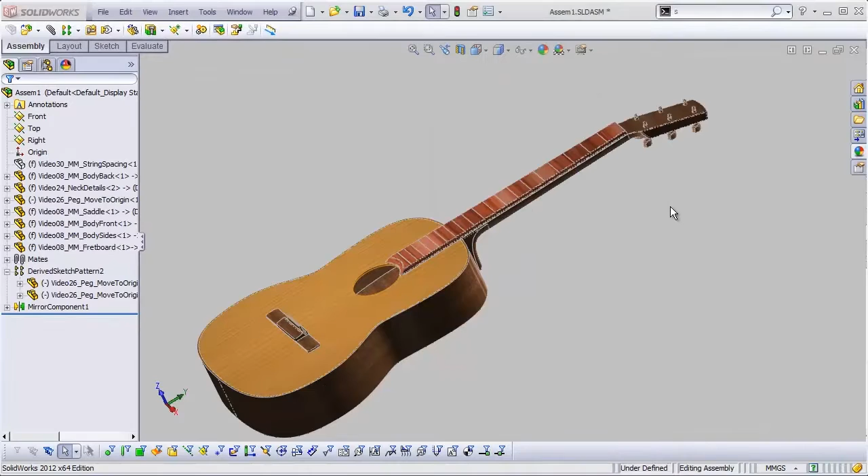Now we want to actually put the nut on this thing, but the nut is a little bit different from some of these other components in that it's not really important to put it in here. It's kind of cosmetic more than anything, because probably if you were putting a nut on this thing, you would probably buy it online, and then you would just chop it down to the size that you want, and then notch it as needed.

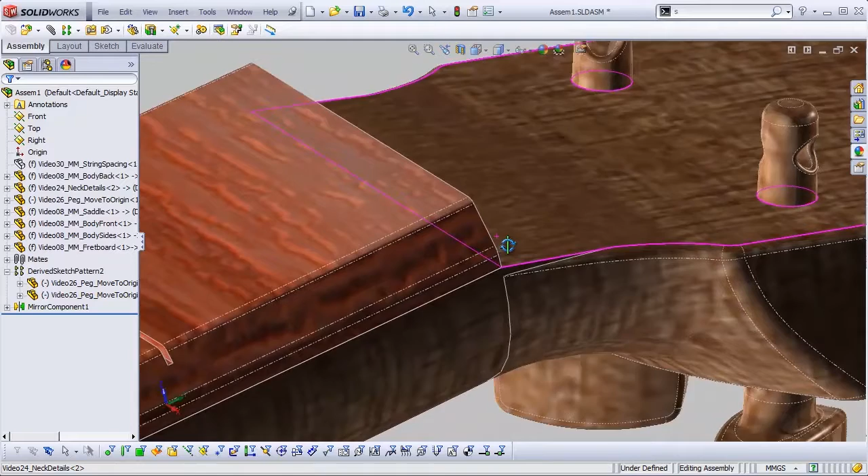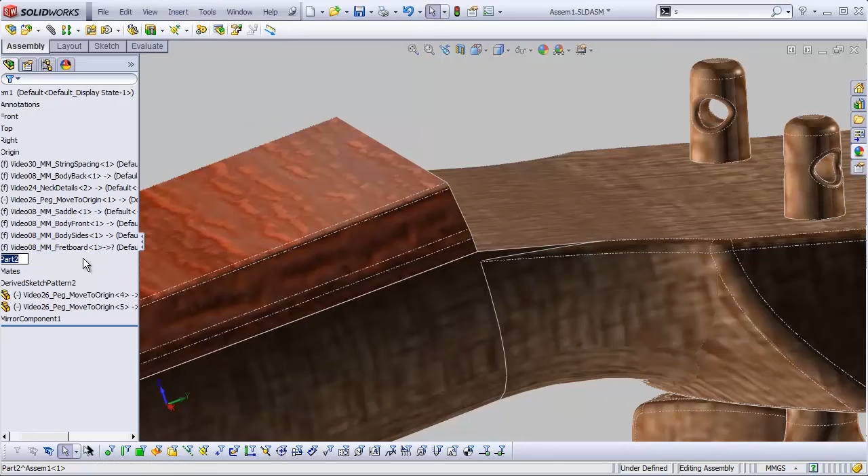So in this case, it's really a cosmetic component. We don't need to have the same rigorous control on it that we have on everything else in this assembly. So let's go and create a new part in the context of our assembly. It's going to drop it in, give us this little check mark, and the check mark is so we could create a sketch. So I'm just going to hit escape because we don't need a sketch right now. Then I could rename this. Let's call this video 31 nut. Alright, so we have a nut here.

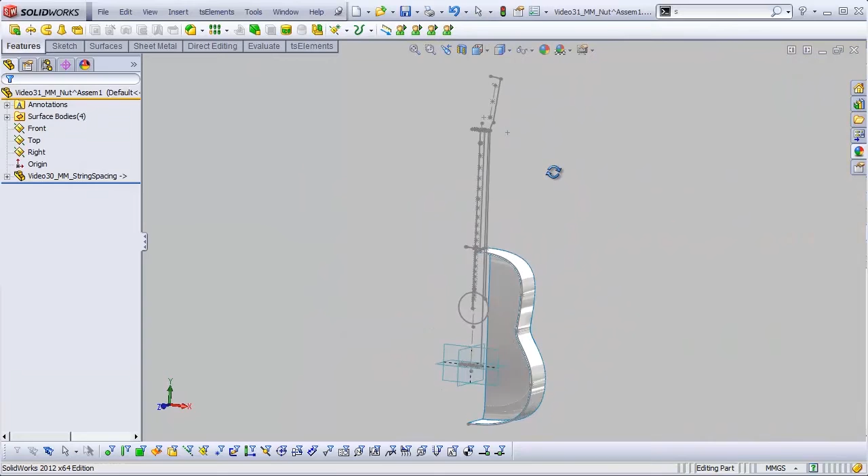Now I'm going to open that file. So we have our new blank document here. Insert part. And then I'm going to find the most recent version of the master model and insert that. So we have it. This is just like every other component that we've created so far, by the way. And when we bring this in, let's make sure that we get our planes in there as well, because we're going to want those. We can hide these surface bodies, and we can hide all those planes as well, for now. And then close this guy back up, and we'll go back to our assembly.

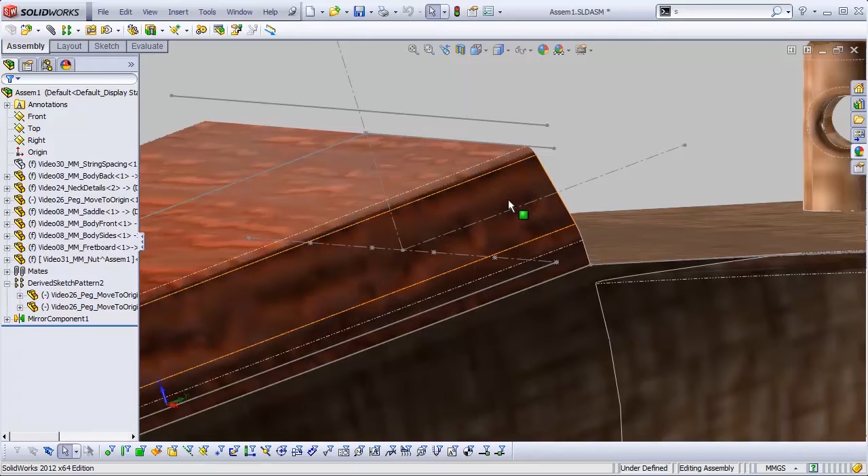Now we can see our sketch components are in place, and those are going to be really useful, and we even have our nut height sketch right here ready to use. But the other thing about creating a nut is that once it's put in here, we're going to want to file it down so that it matches the profile of our fretboard. There are different strategies by which we could do this, and I'm going to do it in a way that, for a robust assembly, I generally don't recommend. But in this case, because the nut is kind of an unimportant component, I mean, it's important for playing, but in terms of this assembly, it's not a critical key piece of the guitar. So I'm going to take a shortcut.

Let's grab our nut file here, and first of all, let's make sure to save it. Right now it's in brackets. You can see the name is in brackets. That means that it's internal to the assembly. It hasn't been saved in an external part yet. So let's go here and say Save Part in External File. Click OK, and that's just going to save it out for us so that we have a copy of that externally that we're referencing.

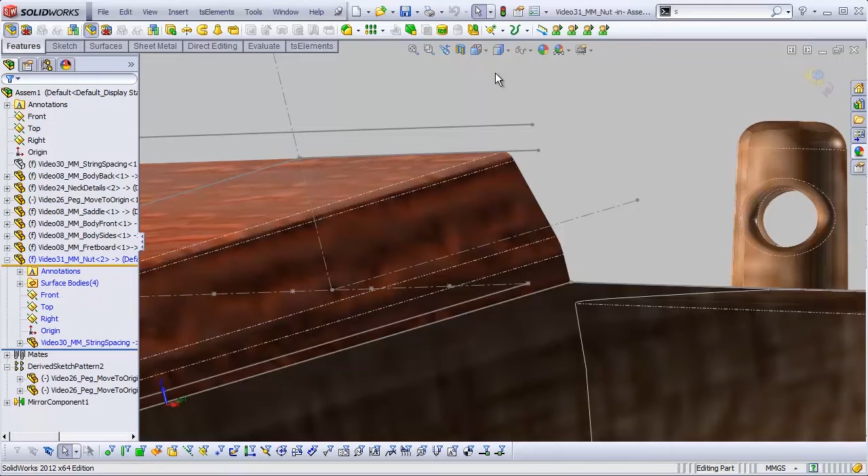And now I'm going to click on it and click this Edit Part button. So it turns blue because we're editing it in the context of the assembly. And now we can actually work with it. What I want to do is grab hold of these surfaces and bring them into this part. And we have a couple of options when we do that. When we're working in the context of an assembly, you're going to see this little button right up here. It's kind of a link icon with a red X over it. And that says No External References.

Now generally, when working in the context of an assembly, I recommend leaving this checked because you don't usually want to be making cross-references within an assembly. You don't want one part in an assembly to reference another part because trust me, that just gets messy. I mean, real messy. It's going to make your life really hard. But in this case, I'm actually going to make an exception to that rule, because it's going to be really helpful to us to be able to reference these surfaces.

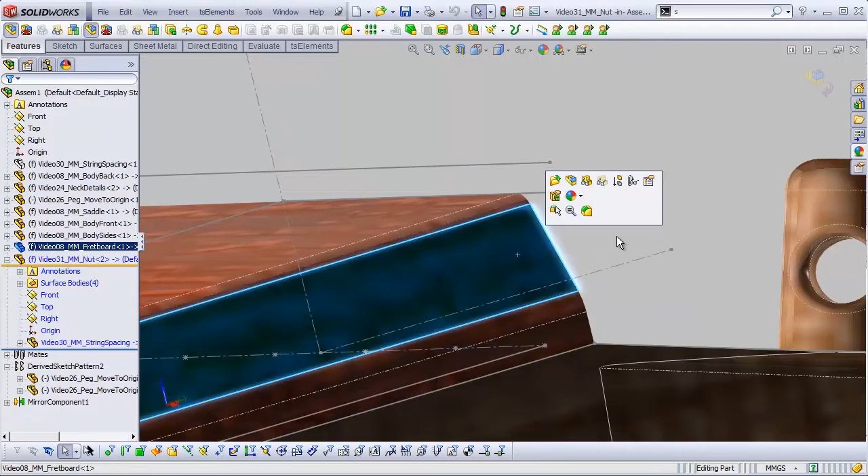And like I said, this is a non-critical component, so we can get away with it. So let's go to our Surfaces tab here. We're going to leave external references turned on so that we can grab our Offset tool. Grab these three surfaces and just offset them by 0 millimeters, which is just a clever way of duplicating those surfaces into our current component. So now we have them in there to work with.

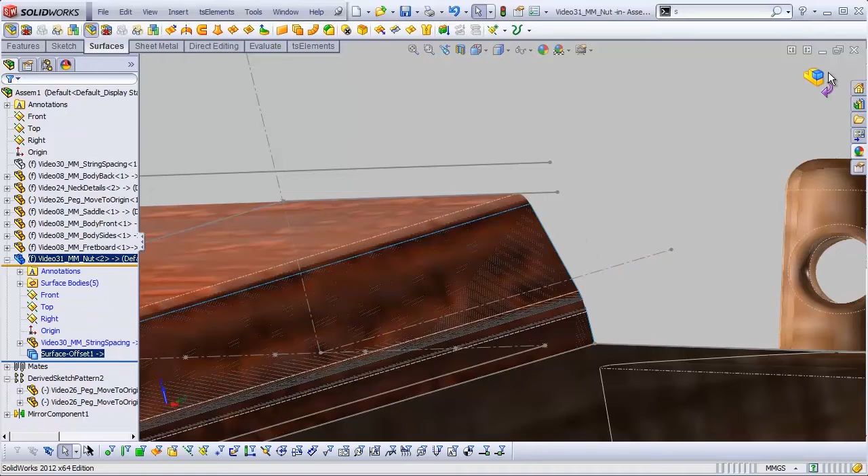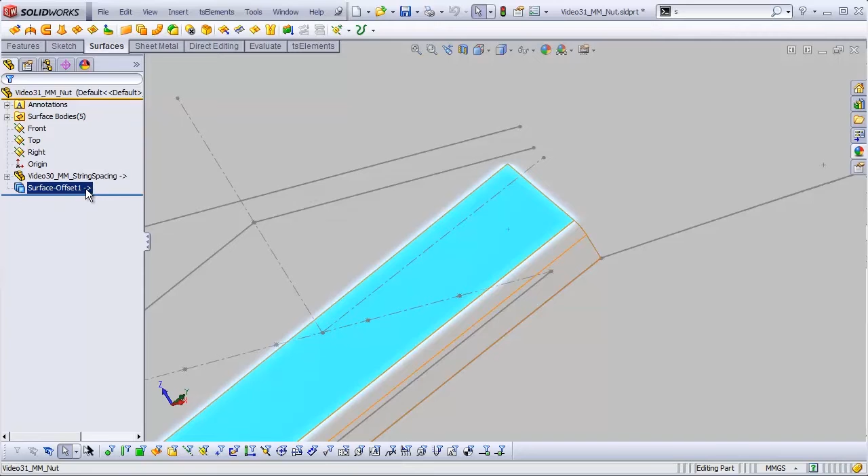So we can exit that now. Let's open up this part. And we're going to see that now, if we zoom in here, we have those surfaces in place, and those surfaces happen to reference that other component, the fretboard component itself. So you can see here the surface offset has this little arrow next to it. That little arrow means it's referencing geometry outside of this document.

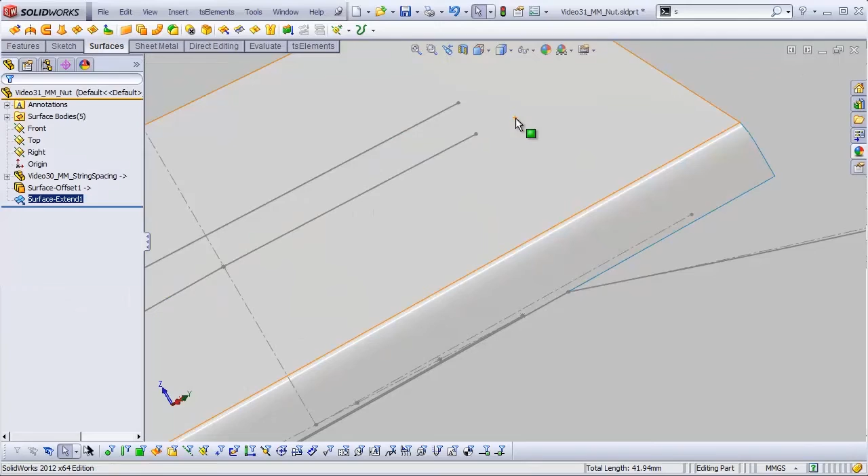Alright, so let's go up here to the top and grab our Extend Surface tool. We're going to extend this edge, and how about we get these three edges as well. And we'll go out by 10 millimeters using the same surface method. Click OK, and now we have a little bit of extra to work with on that surface. That's going to be useful to us. And then also we'll probably want to define the top of our nut.

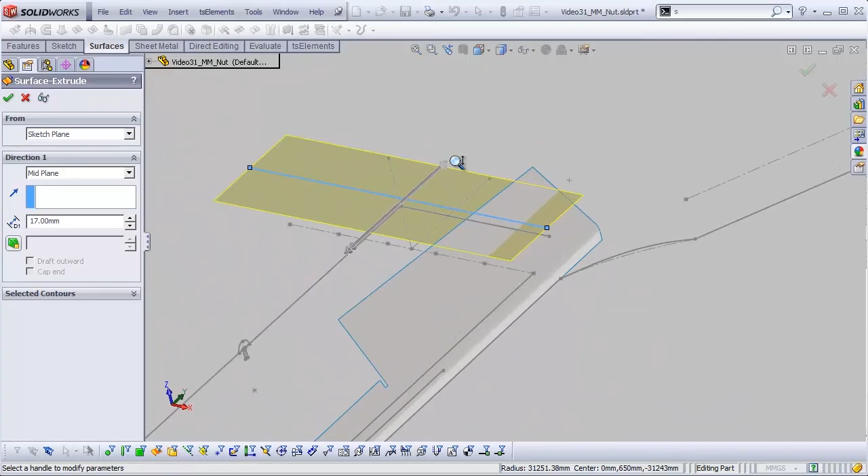So let's extrude this. I'm going to extrude that out. Let's just say it's a mid-plane extrusion, so we're going both directions. So we get more than we need on there. There we go. So that's plenty nice and big. And finally, just to be sure that we got plenty of this, let's edge extend this last edge out just a little bit on that side. Looks good. And now we can actually model the basic shape of the nut.

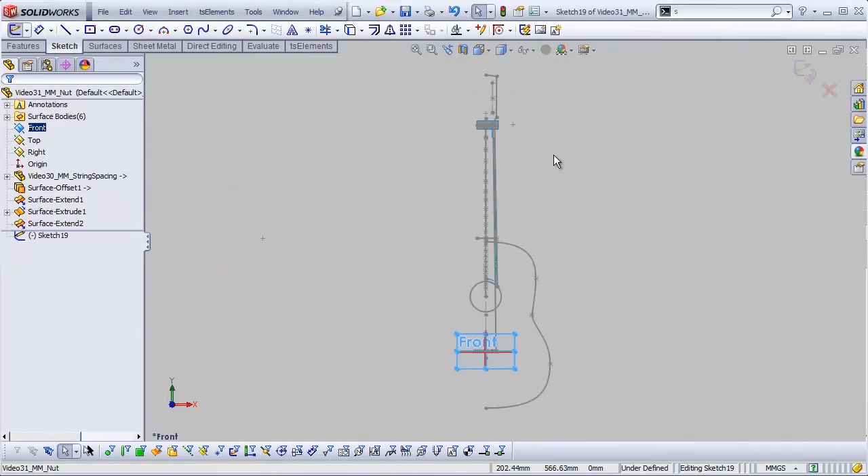So let's go to the front plane and create a sketch. Zoom right on in. Grab my rectangle tool. I'm going to do a corner rectangle, just like so. Grab my right plane and make this edge collinear with the right plane. I'm going to make this point coincident with this outside point on our fretboard. And then we just have to define the width of this guy.

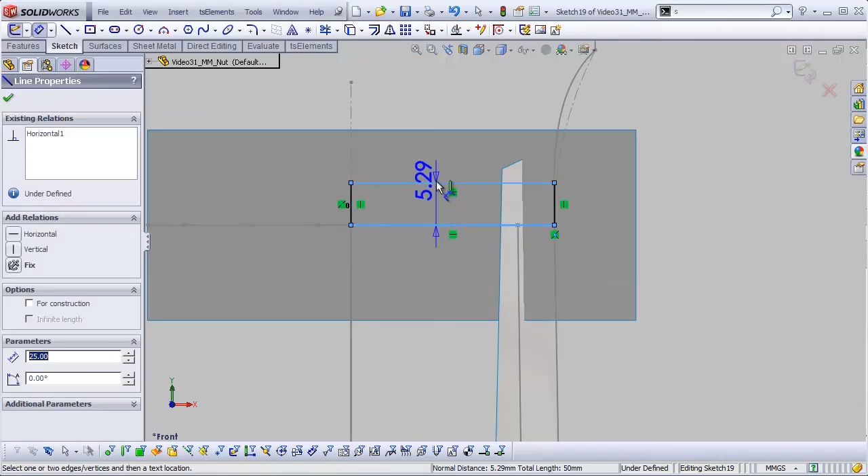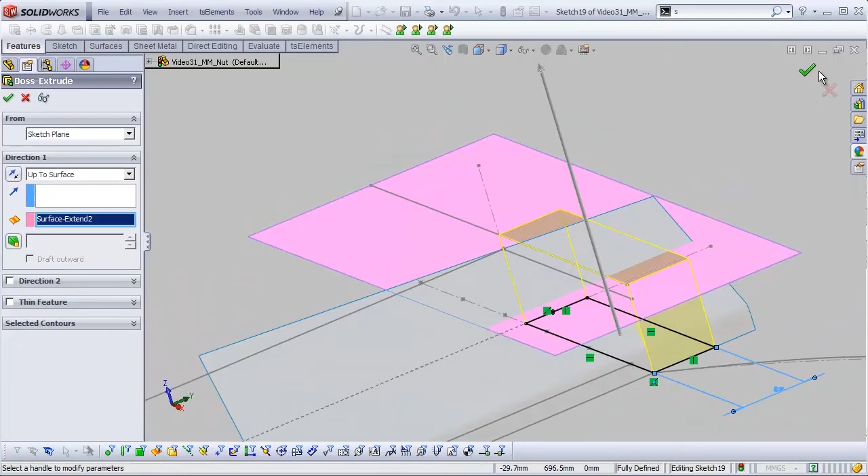We'll set it to, I believe, 6 millimeters should be just about right. A lot of times these things are 1/4 inch. We'll just call it 6 millimeters and be done with it. And we'll extrude that. And when we do our extrusion, I'm going to say up to surface, and we'll just come right up to this nut height surface that we created. Okay, so we got a solid there. We can hide that surface. We don't need it anymore.

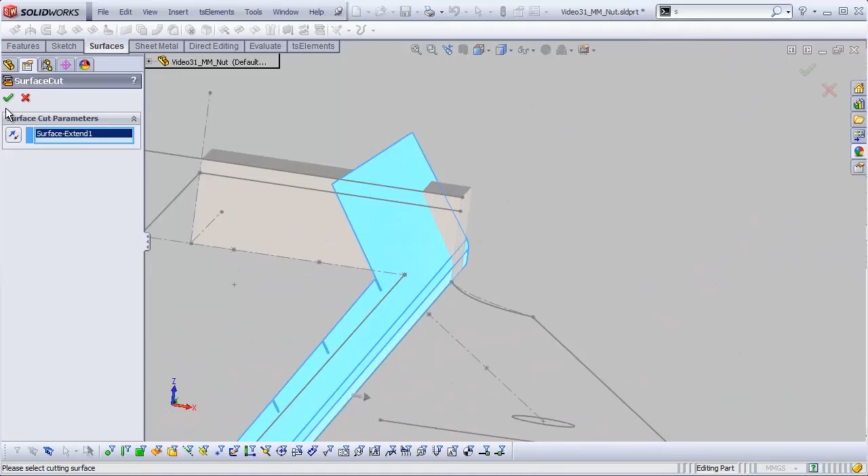We can also go to our surfaces, cut with surface, use this surface that we imported from our fretboard. Let's find that arrow that shows us which direction it's going to cut. I'm having trouble finding the arrow, so I'm just going to click OK and hope for the best. And it looks like it was already pointed the correct direction. Alright, so that looks good. Pretty happy with it. Let's go to our features. We'll grab our round tool.

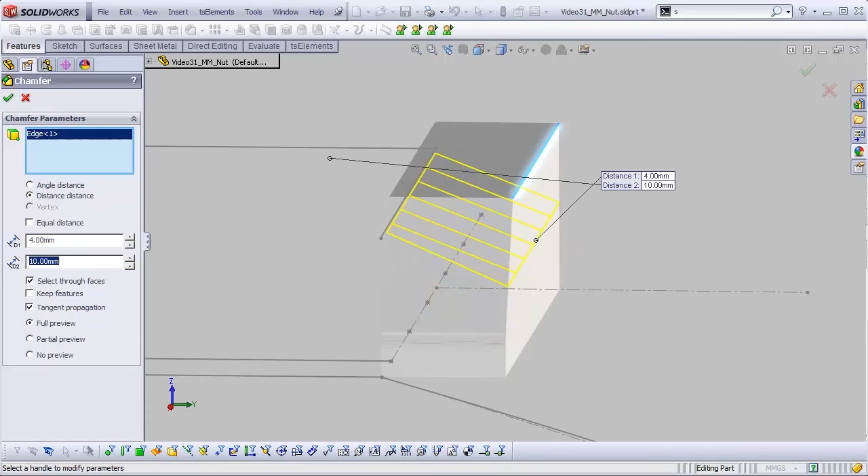Let's do a chamfer. I'm going to grab a chamfer on the back edge of this guy. I like distance chamfers. It's kind of a style thing. You can do whatever you want. I'm going to make it 4 millimeters on one side, 10 on the other, and actually I think this first one is what I want to be, I don't know, 2 millimeters. That looks better. Yeah, so we got a little bit of something to work with there slope-wise for the strings to go straight down. And then we could duplicate this.

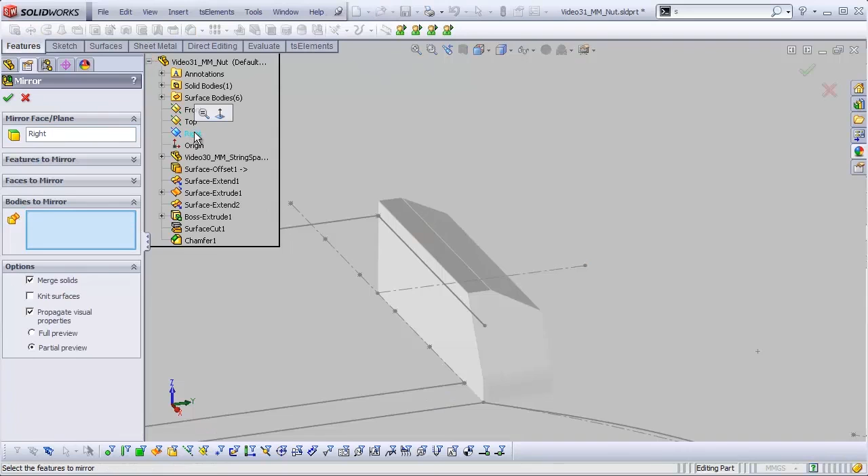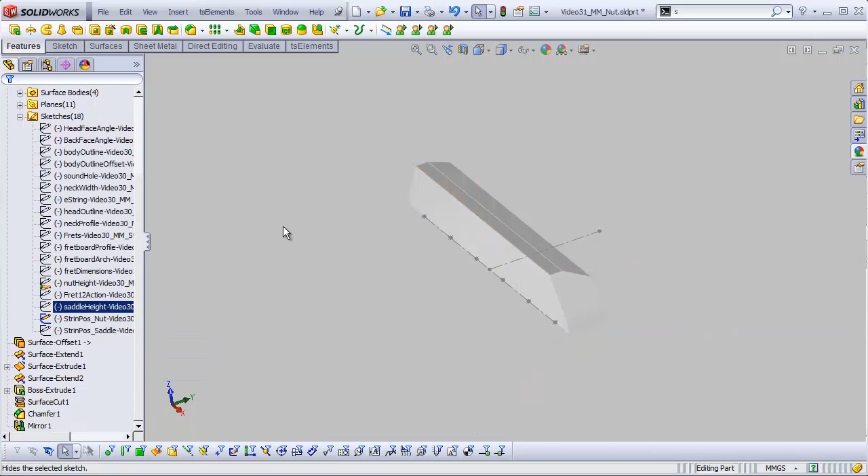Let's go to our mirror tool. We'll grab our right plane, and under bodies to mirror, we'll mirror this body with merge solids enabled. Now we've got a full nut here ready to go. Let's go ahead and hide all of our sketches just to get those out of the way for now. We're going to need a couple of those later. Let's hide this. We need our string positions for the nut, so we'll just leave those showing for the moment.

Close that up, hit save, head back over here, and we are looking pretty good, right? Not too shabby.